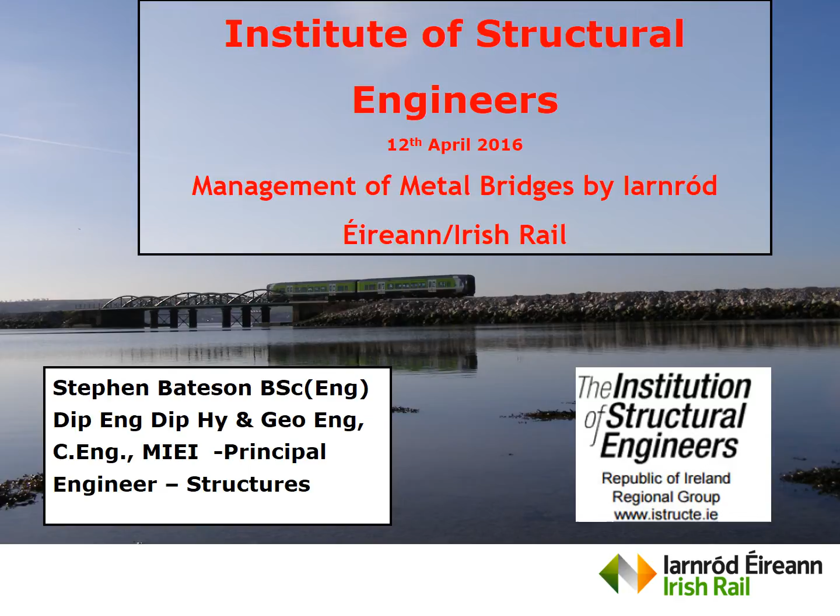Irish Rail has obviously a historical stock of bridges back from when the rail was originally built. So we've a selection of materials like steel, wrought iron, cast iron, and the maintenance program for these is specialist based on railway working.

So you have a selection of materials. You have wrought iron, cast iron, early steel. There's riveted connections, riveted plates, and so on.

So any work that we do has to be within the confines of the material, and we also have the problem with running trains and so on. So obviously any work we have to do has to get done within a railway possession, and also fit within the existing railway envelope and so on.

So our maintenance renewal program is based on a cyclic inspection regime, and we have a bridge management system.

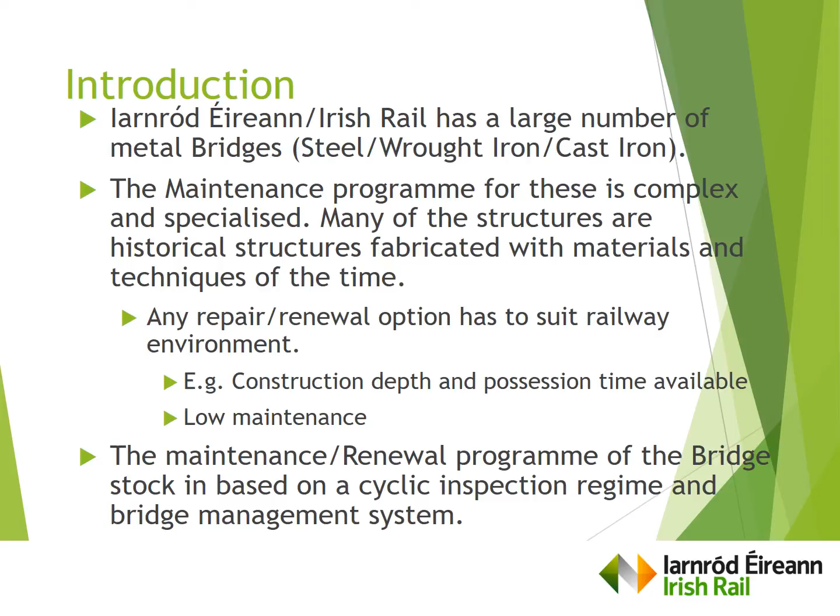So the topics here to discuss are the number and the nature of the railway bridges, the bridge management system, the common defects that we see, our design criteria, our repair specification, our paint specification, and I've included a case study on the Boyne Viaduct, which we undertook the work mostly in 2015.

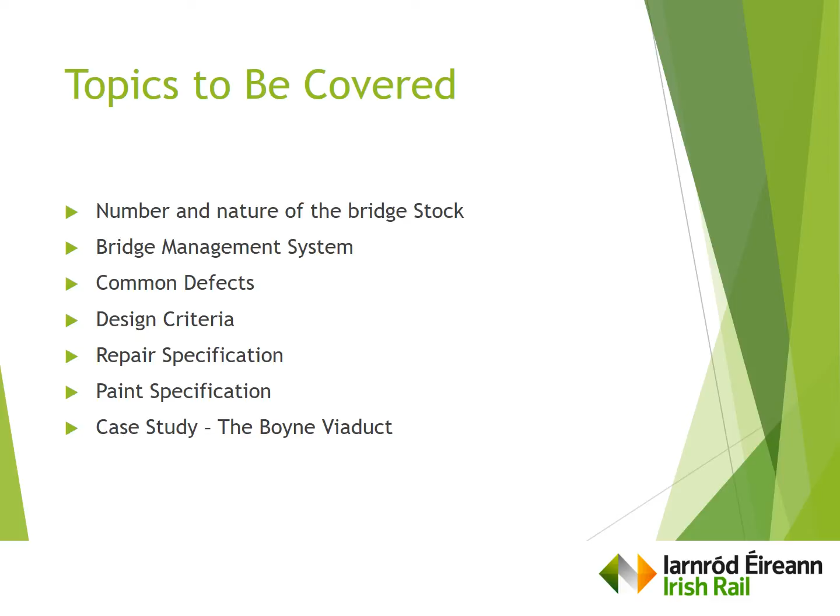Within the Irish Rail network, we've got approximately 5,200 bridges. Approximately 1,000 of those would be wrought iron or steel. There's a few bridges with cast iron elements, mostly decorative now. There would be no load bearing cast iron elements.

Most of our metal bridges would be under bridges, which is where the road or the river or whatever is under the rail. Our over bridge is where the road mostly would be over the rail, so the few over bridges would have containment issues. They tend to be plate girders, so they would have road restraint issues. Thankfully we have few of those.

There are a few cast iron jack arches, but they're on disused or abandoned lines, and none of them are on operational railway lines.

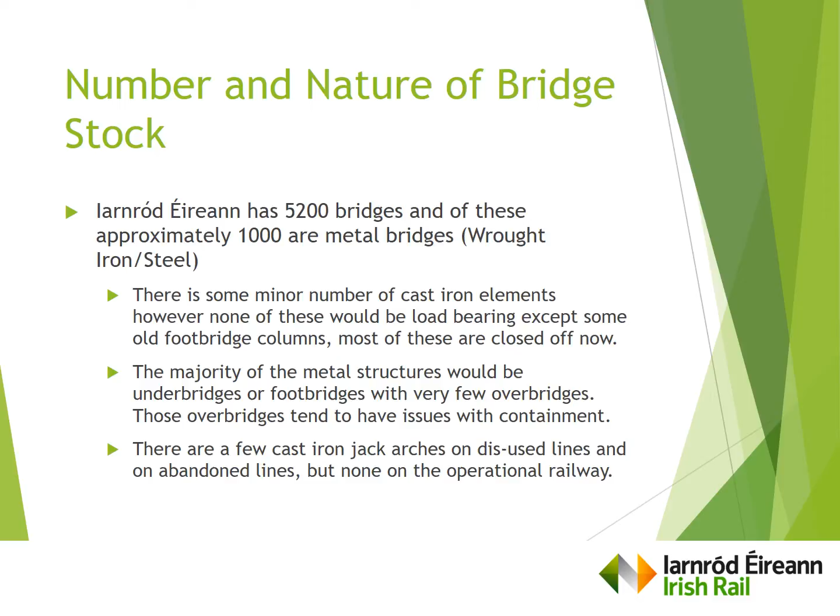Within that 1,000 bridges, there's approximately 330 troughing bridges, which is the corrugated steel or wrought iron flooring. But an additional 200 of those would be plate girders with either solid plate or again corrugated.

Some of these we term principal bridges, which is a span greater than 30 metres, or multiple spans with spans greater than 20 metres. Some examples of those would be the iconic bridges like the Boyne, Thomastown, the Loop Line Bridge, Gormanston, Bellvelley, Slatty and Drumsna.

So again, to make up the 1,000, the remaining would be footbridges or troughing bridges that span abutment to abutment. Troughing would be very much a railway bridge, very basic design and detailing. In terms of other networks, Irish Rail would have comparatively few large principal bridges.

A colleague of ours worked in Network Rail in Manchester, and within that area alone they have a greater number of principal bridges than Irish Rail would have in the complete network.

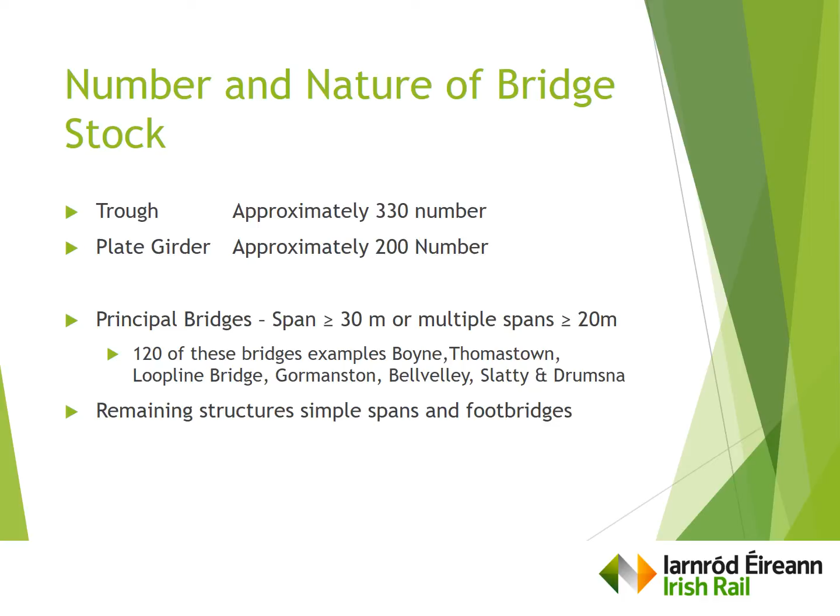So we'd have plenty of examples of Dorman and Long.

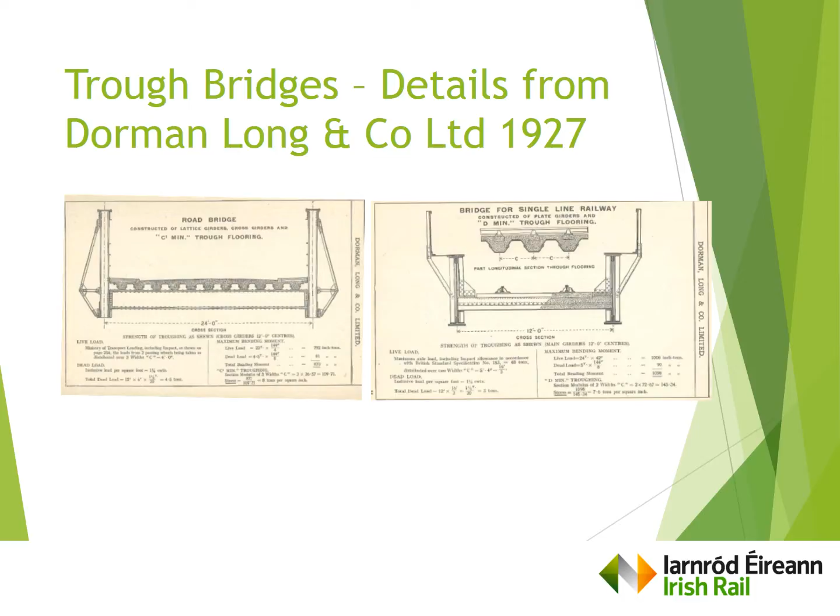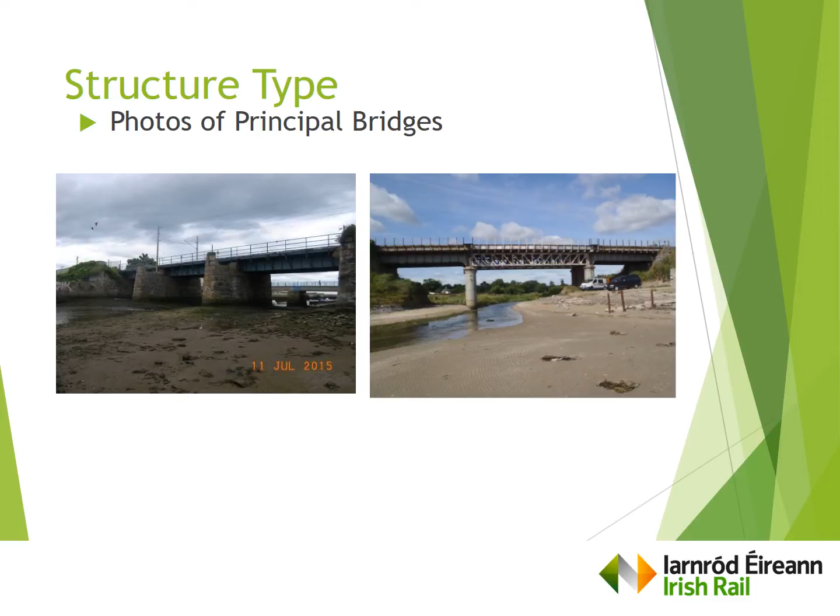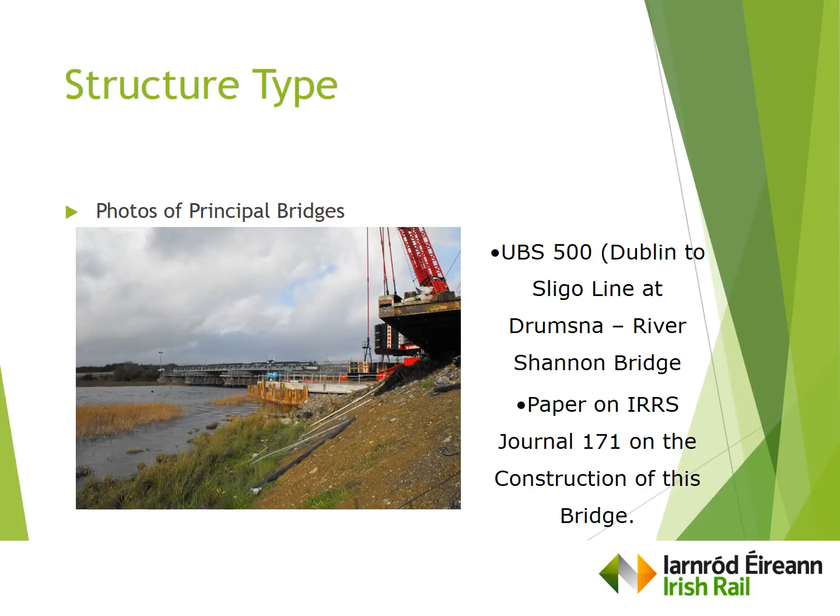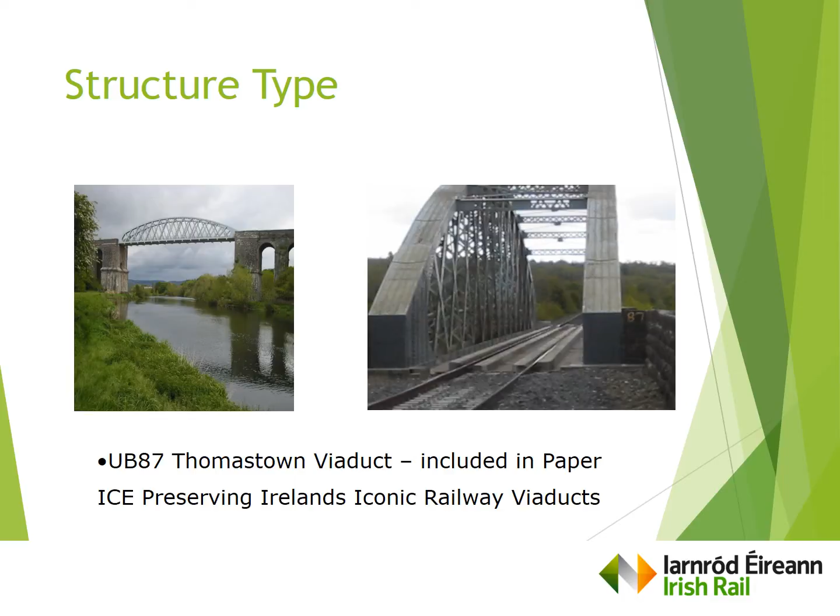In terms of our bridge management system, we undertake a biannual inspection of all our bridges, called a general engineering inspection. Every 6 years, the same structure gets a principal engineering inspection, which requires a touch inspection of all the load-bearing elements. So we've access requirements there.

We also undertake a rope access inspection on the large spans, the multi-span principal bridges, and that feeds into our assessment section, which I'll go into now.

All our bridges are rated under design, condition and deterioration, and we call it a DCD score. Obviously the condition and the rate of deterioration are the variables that may change within the period of inspection, so within every 2 years you have a measurement point for the condition or rate of deterioration.

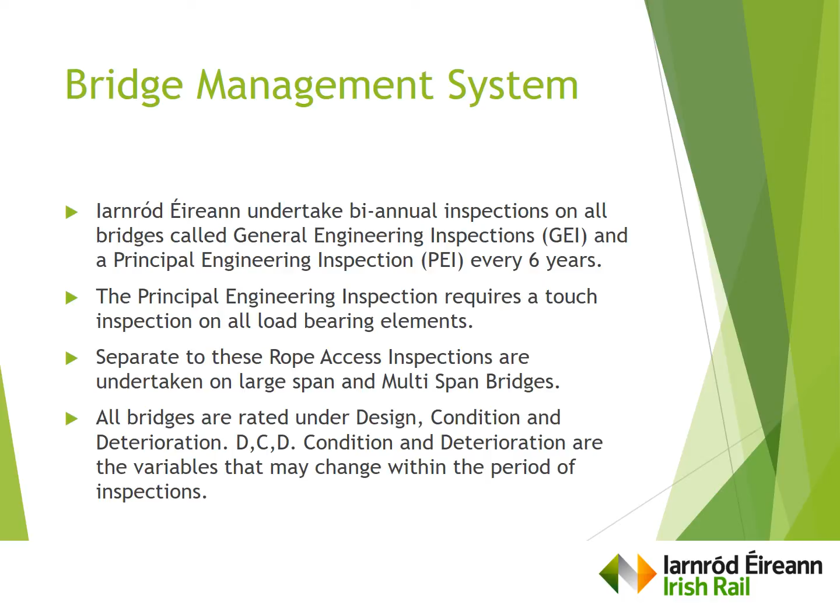So assessments - we have undertaken assessments in the past on a case-by-case basis, primarily to BS 5400. We're trying to develop a more formal process, progressing that from this year. It involves desk studies, data collection, assessment calculations. We're going for level 0 as in the Network Rail assessment program.

Network Rail said they would undertake a full assessment on all their structures over an 18-year interval. They commenced that, but they found that time caught up on them. So in terms of the complexity of the assessment, they had a level 1, level 2.

They actually developed level 0 to allow for a kind of generic assessment on similar spans - like all plate girders up to 20 meters with a depth of a meter and 300 width and so on - they were able to provide an assessment to that level. So they're stating that they're getting closer to getting full completion in 18 years.

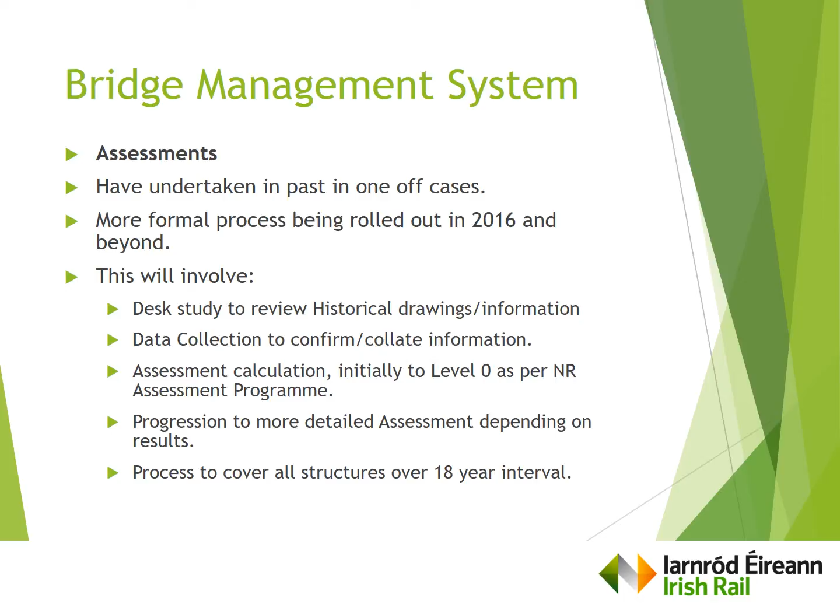Just a section here on the common defects. Our biggest problem is water and corrosion of our bridges, and then the lack of money to maintain them.

We find that we are overly relying on the fact that all bridges were very well built. They put pitch and tar over the steel elements, and that has held for such a length of time. But as deterioration increases over time and progresses, you find that the waterproofing is breaking down, so that you get corrosion at the back of bearings and the back of main beams and trimmer beams and bracings and so on at the back of the bridge.

The paint systems that were originally employed were lead based, and again, due to lack of investment and lack of painting - if it wasn't for the red lead, we'd probably be in a lot worse situation.

Drainage in the form of drip eyes from the decks - where decks were modified, you may or may not have had a proper drainage system or drip eye installed to remove the water. When they were installed, they also needed to be maintained, and we found that if they weren't maintained, it often causes as bad a condition when the water starts running onto main elements and so on.

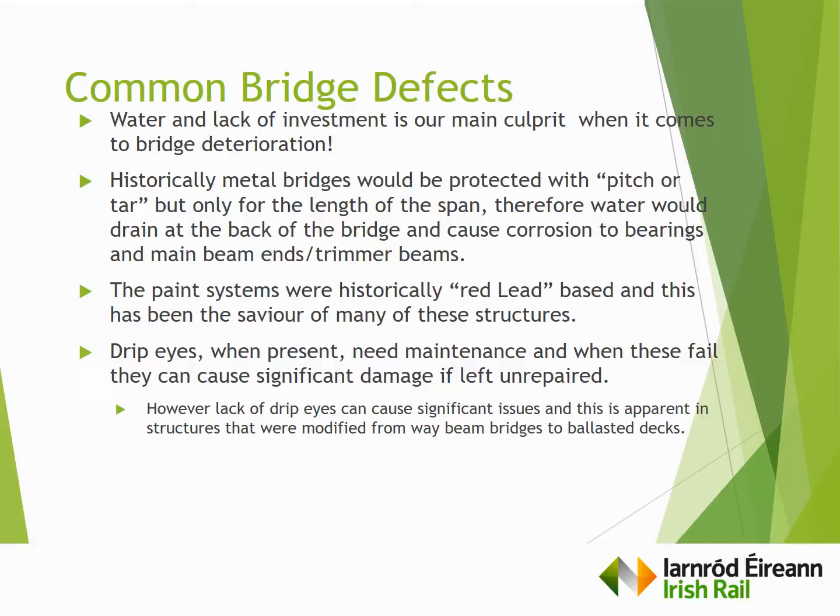So again, a few photos and things like that. In the 90s, the Belfast Line project had traditional way beam bridges, timber decks on top of steel or wrought iron structures. They took away the timber rail elements and put down flat plates of steel.

They were never particularly sealed or had drip eyes installed, and then we come along 20-25 years later to find that the tops of flanges and bracings have all corroded in a perfect way, because we've basically provided water and oxygen to a perfect location, with all sorts of material dripping down with the crushed ballast. So it all creates an environment where water can sit and progressively corrode the elements.

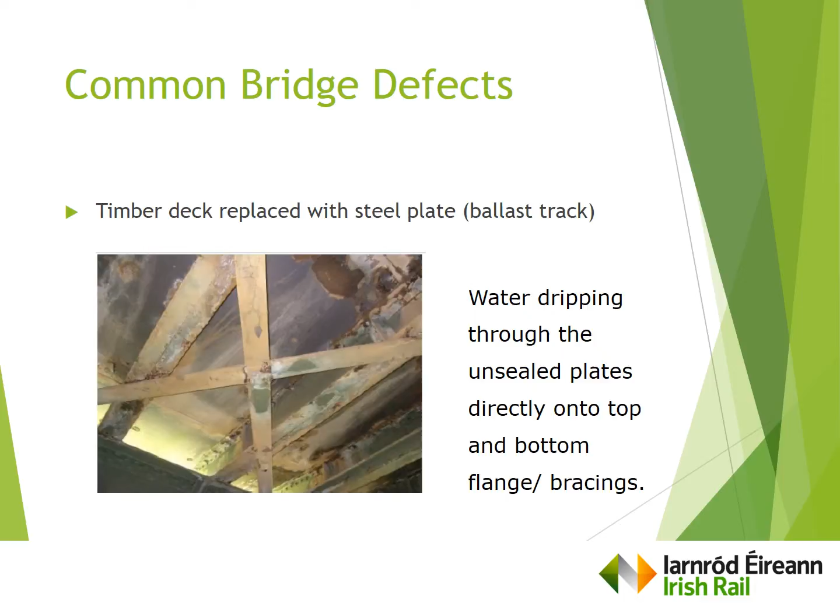This bridge here on the left, that's the corrugated troughing sections sitting onto a main girder. There was never drip eyes installed, there was holes left, so you basically got water spreading out across. Once the water sits in, it starts corroding on the inside of that bottom flange. It's very hard, if at all, to repair it.

Over here, that's actually a photograph from the Boyne Viaduct. The drip eye at one stage was functional, but once it started to corrode, as shown there, the water was basically just dripping onto the bottom flange, corroding and damaging that area.

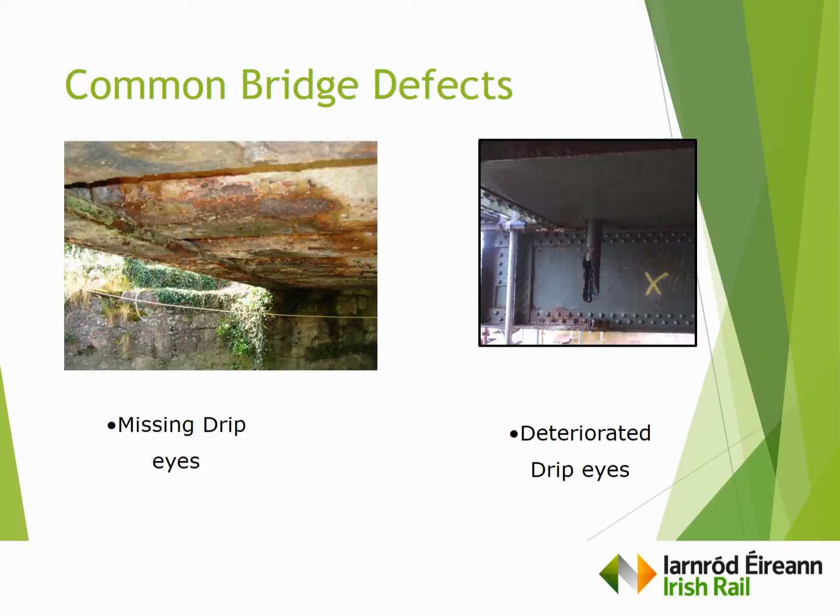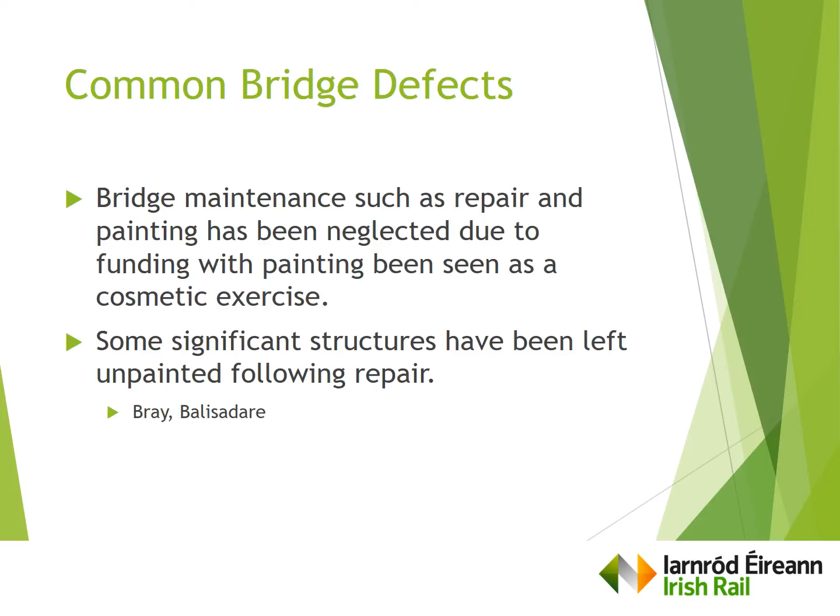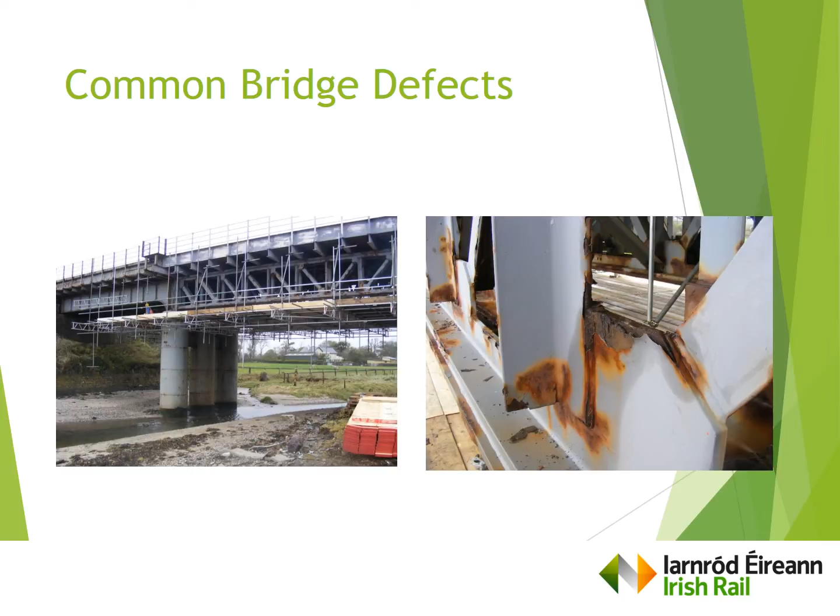That's Gormanstown there. That bridge, we went in to repair it, and found the painting system had basically completely failed in 20 years. There was no stripe coating, and for a new deck it was in poor condition after a very short period of time.

On the plate girders and troughing bridges, this would be one of our most common defects. The web stiffeners would be maybe 2-3 feet centres on the girders, and once there's water sitting in underneath that stiffener, you get a significant amount of corrosion. We would go to some bridges and maybe require 30 or 40 of these to be replaced. Depending on how bad the corrosion is, we might try a local repair, or sometimes we have to replace the whole thing.

Again, that was one of the bridges with the top flanges, water coming down through the top plate.

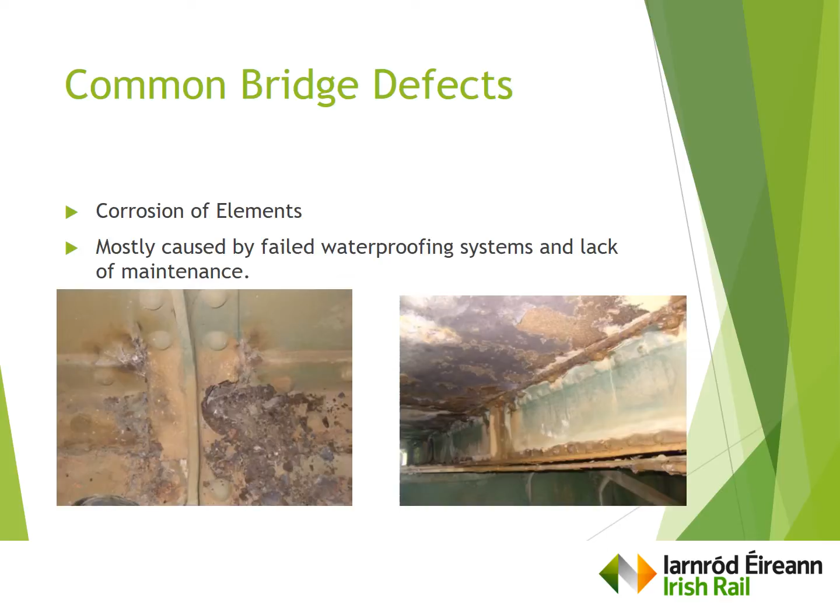Rivet replacement - we have a bridge gang, and up to the 1970s they were still doing hot rivet replacements, but nowadays we replace rivets with HSFG bolts, grade 10.9. They take a fair bit of effort to remove and replace.

We allow about 1 in 10 to be damaged before we start replacing them. But on a general enough bridge repair, we could do 2,000 or 3,000 rivet replacements on a bridge. I think we did 15,000 rivets replaced on the Boyne. It's a traditional system we've developed and tried to improve. We have to burn the head of the rivet and use a rivet punch to force it out. It's a noisy, time-consuming, and difficult process to undertake in confined spaces.

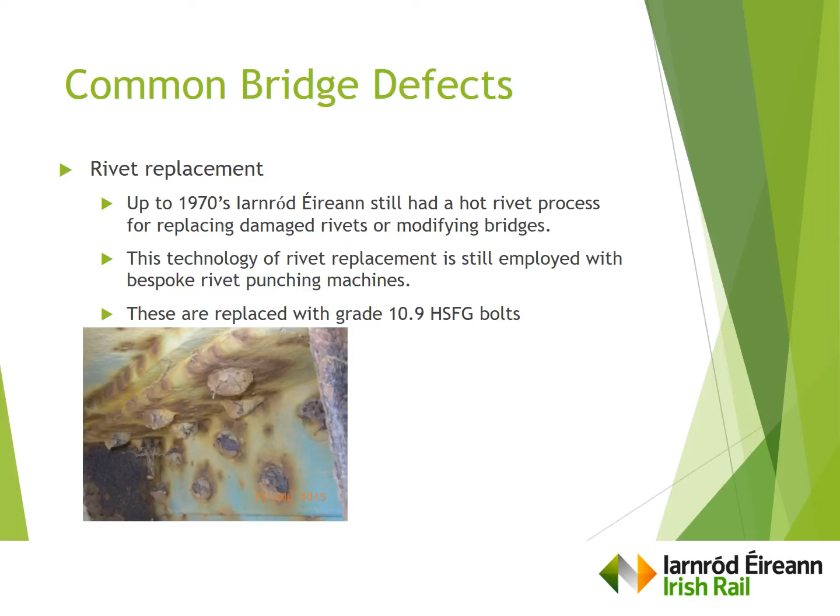Just going to show a few photographs, most of these are from the loop line bridges between Amiens Street and Pearse Street. Again, most of them are plate girders with troughing sections on top. Very hard to maintain, being the busiest location rail-wise and probably the busiest location road-wise, so it's very hard to get road closures and rail closures to coincide.

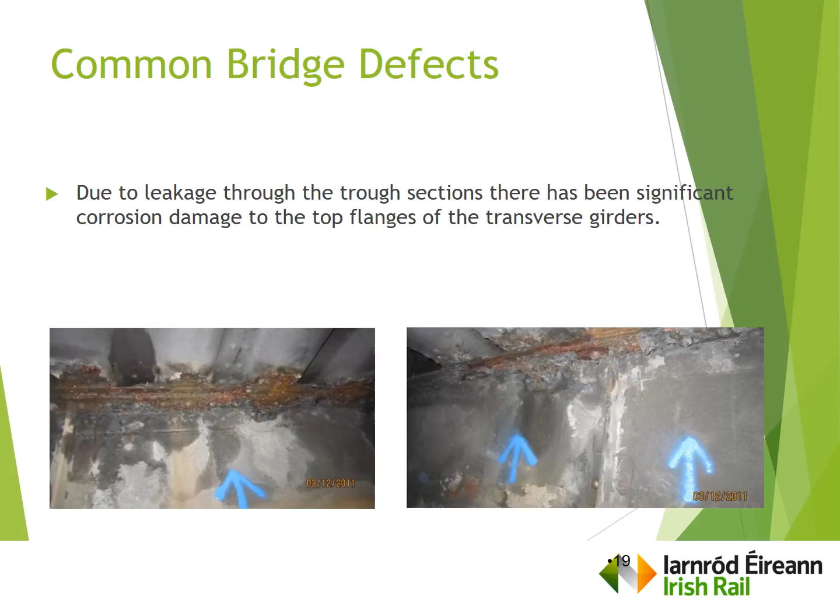They've suffered from that effect, and we've tried to do lots of patch-up work trying to stop water coming through. But you can see that would be the summary of the general engineering inspection - multiple areas of leakage, flanges and damage, bridge strikes.

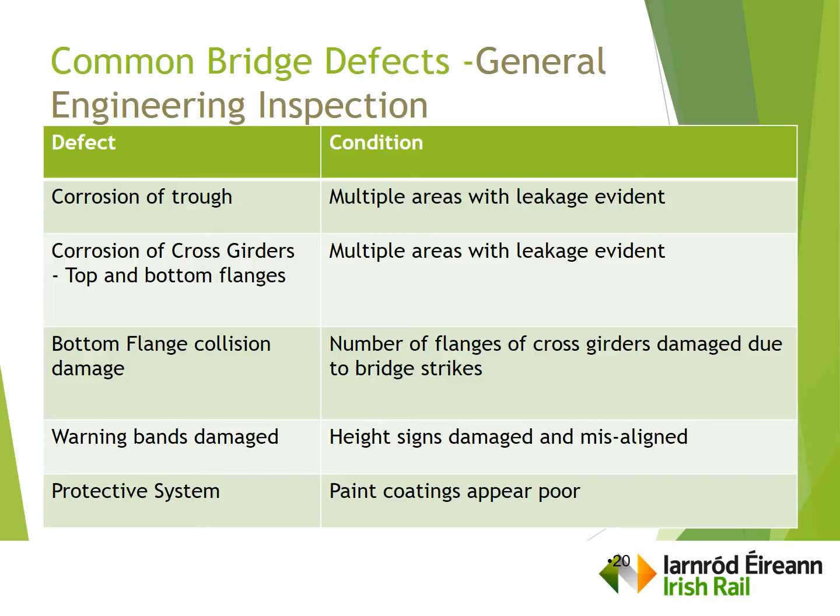I'll show you a bit on bridge strikes, and painting, coatings. The same with this one - you've quite significant corrosion on the bottom flange, you've a knife edge on these. These were just two small repairs that we had to undertake on Amiens Street.

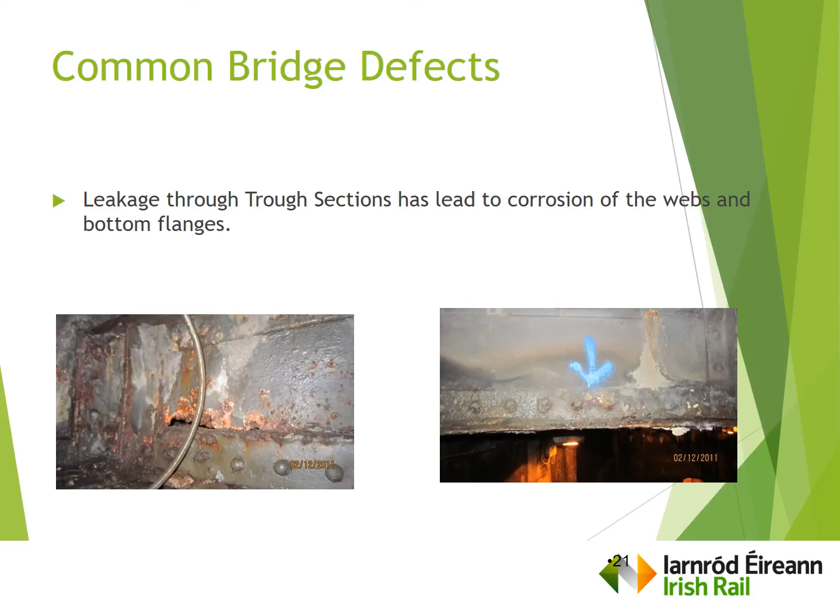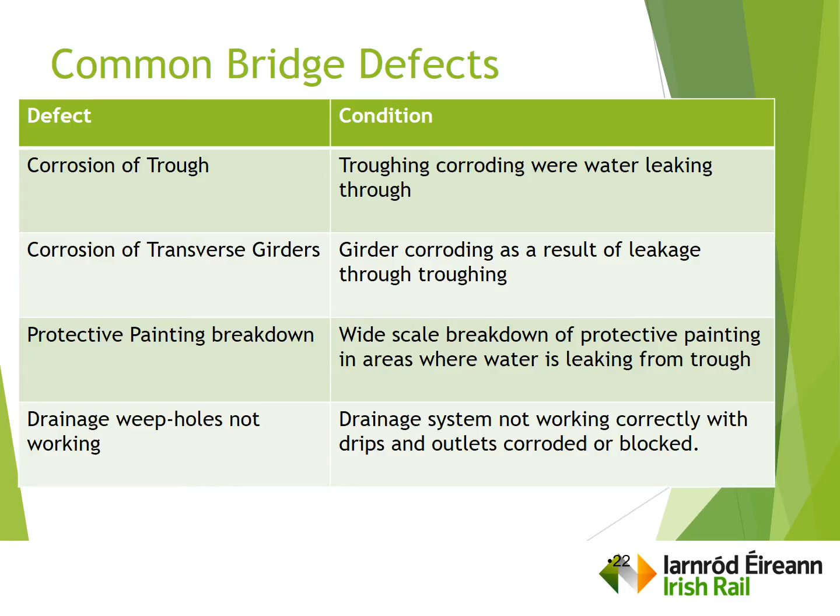A few words of summary on the findings of the general engineering inspection: the common thing is we've leakage, we've water, and it's causing damage. That's the bridge in Trinity College, I think - you have two decks butted together, water dripping into the drainage which goes into a conventional half pipe. That's all blocked up, and then you see what happens - it's just basic corrosion.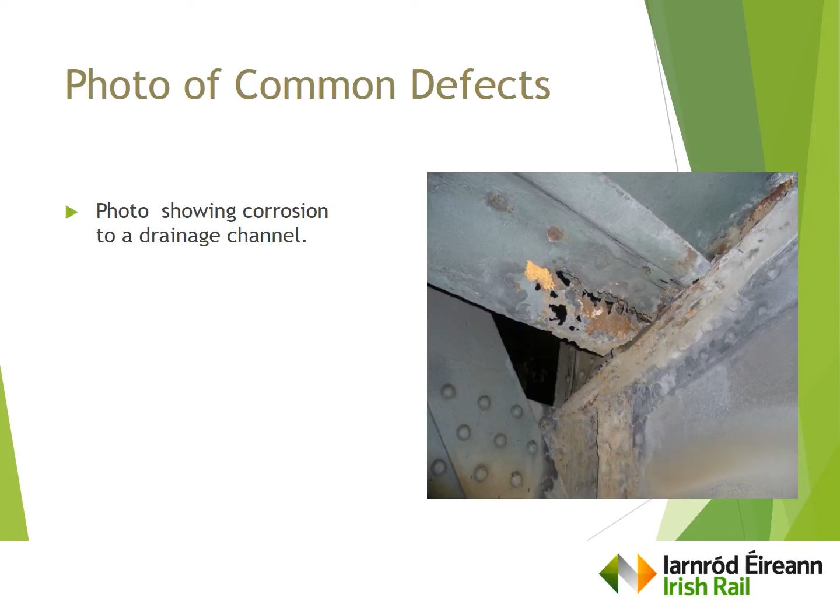Rust jacking - for that we'd have to take out a significant amount of rivets and plate around that damage. We wouldn't attempt to remove or replace that jack plate at all. I think we'd just plate around it and try to seal it.

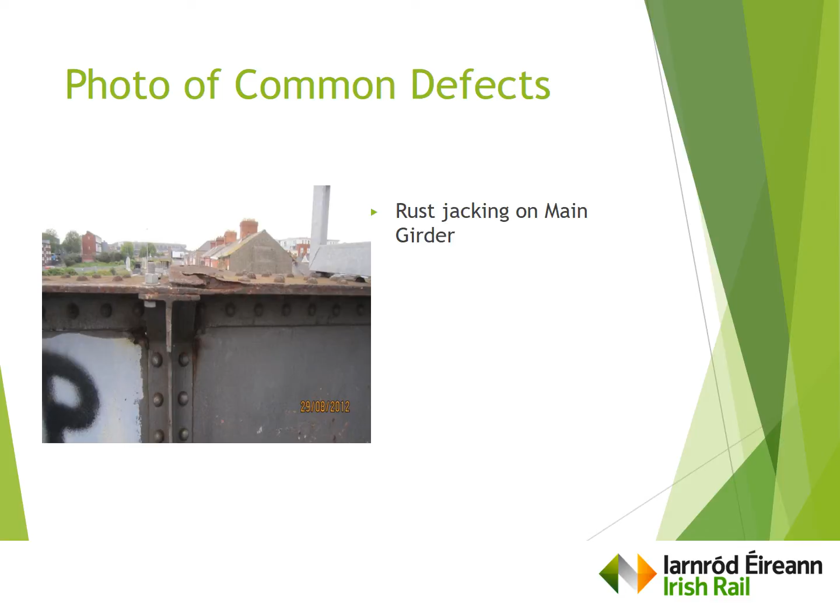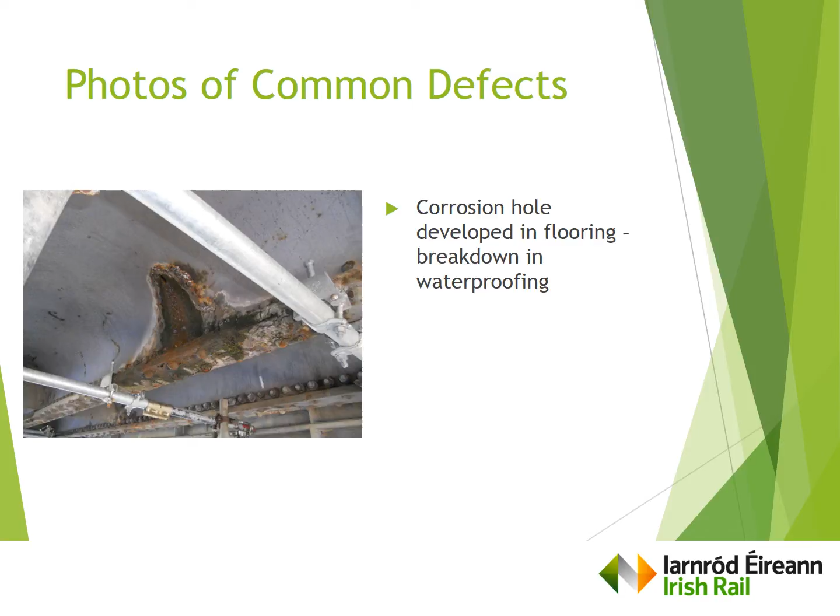The seam on the trough - leakage again, holes and damage to the cross girder. One of our problems again, this is bridge strikes.

Custom House Quay, you can see up on the right hand side there - at one stage was our most struck bridge. It's probably always in the top 2 or 3. Even though vehicle heights are advertised etc., the vehicles still collide with our bridges.

So you can get tears, as in that example there. You can get scrapes - I know it's not a great photograph, but you get scrapes on that - and then you can get kind of bizarre behaviour with guys travelling.

That was a fair job to break the arm off a machine like that. He was travelling fairly fast to do that.

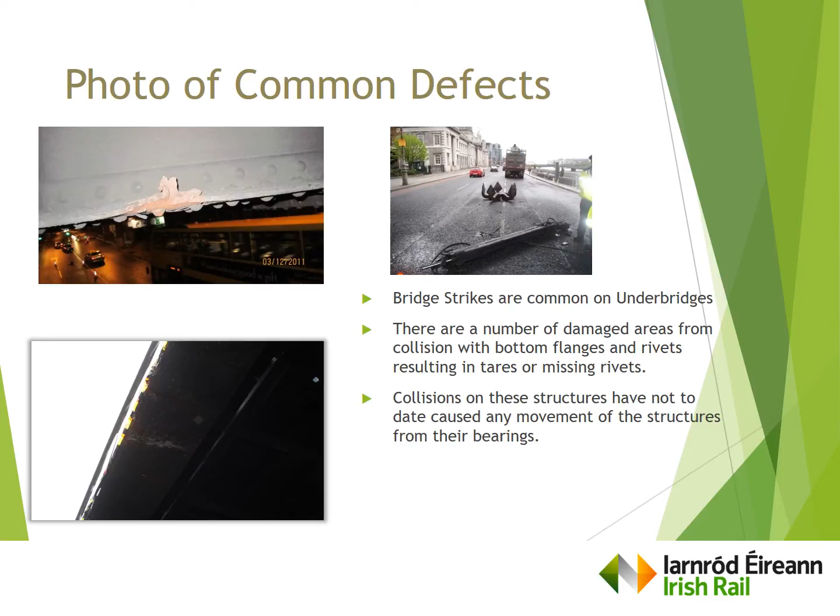So this is just the kind of summary of the damage on what was the most struck bottom flange we have - that's the Custom House Quay. It's facing the Collins Street side, just outside the Custom House.

The construction of that at the mid-span was 7 laminations of single plate, half-inch plates, with 7 lines of rivets. The traffic side had only got 5% of the original rivets remaining, and it decreased across there so the second line had only 10% of the originals left in it.

Every time a bridge gets struck like that, the trains are stopped. We're going out to have a look at it, the track people are going to have a look at the track, and all that time people are sitting on a train wondering what we're doing. The traffic is stopped, and it can be mayhem around.

It can be very difficult actually getting to the bridge for us. But again, we have to go back in and try to replace rivets that have been sheared off like that.

We've tried to do the advertising and so on. We have to continuously do that and re-educate people on it.

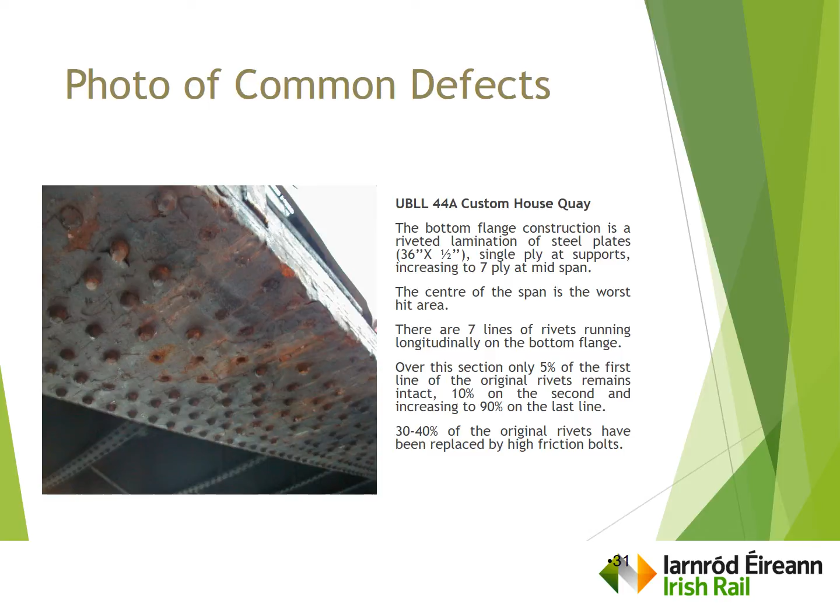When we are designing new bridges, we have a design standard, an internal standard. We design to IS, the Eurocode, isn't it? We have geometric designs we have to meet, so that there's robust curbs and so on, heights of handrails and so on that have to be achieved. We also have standard clearances for trains, so there's a dynamic envelope that has to be provided within any structure to avoid any possibility of collision or so on.

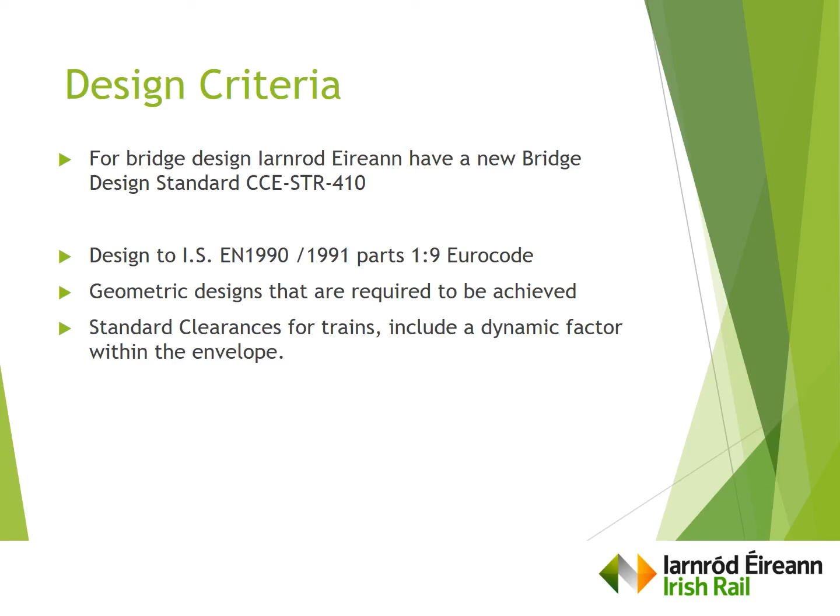We also do kind of like-for-like replacements and designs. This is because a lot of the time we're building back within a very confined envelope, and so we would have to do a like-for-like replacement - we would try to install and put back what was originally there.

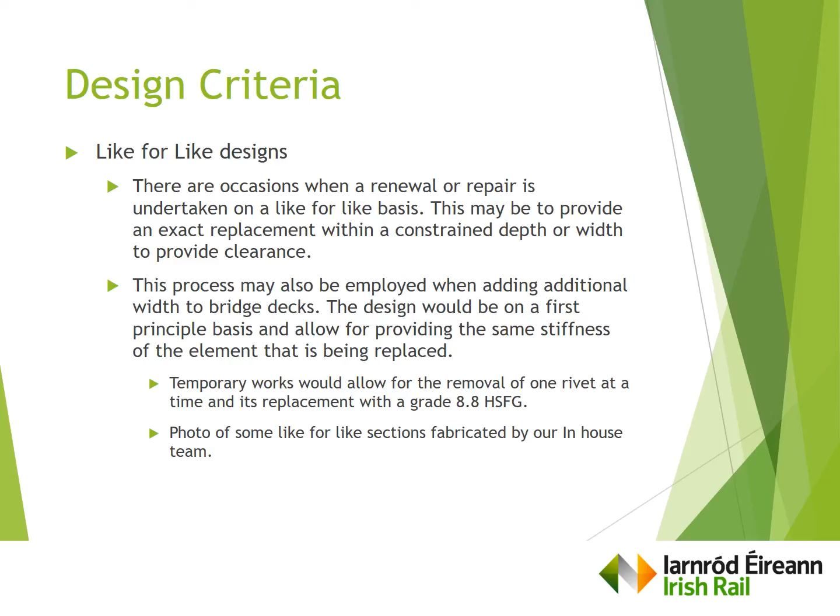I just have a few photographs there - so we'd have to widen out sections and so on. That bridge is quite a low clearance, so we had to widen out a walkway, widen out the deck to provide for a walkway. We had to use troughing sections, reclaimed troughing sections to make that work.

We have a fabrication facility in Mullingar where we do a lot of our own fabrication. So we would do the design in house, or use consultants where required, and for steel bridges we would fabricate them ourselves. We have independent weld testing for that, and also when coating for galvanizing and for painting, we have independent checks for the quality on those.

So we had to replace a full bridge there, so we fabricated that ourselves using troughing sections.

This here, bottom stiffener - there was a bridge near Connolly Station, and all these stiffeners were corroded. We replaced all those, we tried to put them back in galvanized steel, and then when we paint the bridge, the galvanized steel just receives a sweep blast, and then we paint it as we would the rest of the structure.

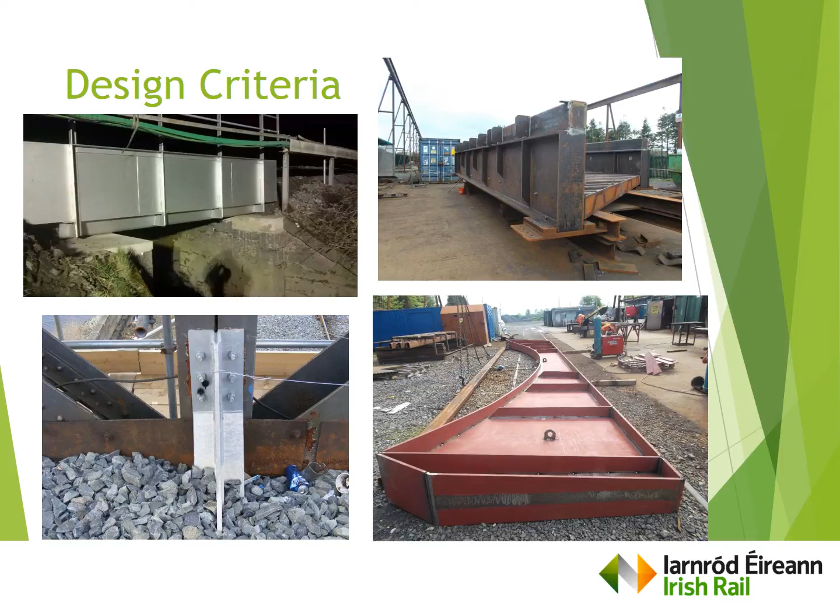Our repair specification would be to reinstate the structure to its original strength and stiffness. It involves significant works when working with riveted plate structures, lattice girders, and elements made up of riveted plates, angles, and sections.

We replace all our rivets with HSFG bolts. We only replace load-bearing members during a railway possession when there are no train movements, and our preference is to replace plate sections with galvanized material.

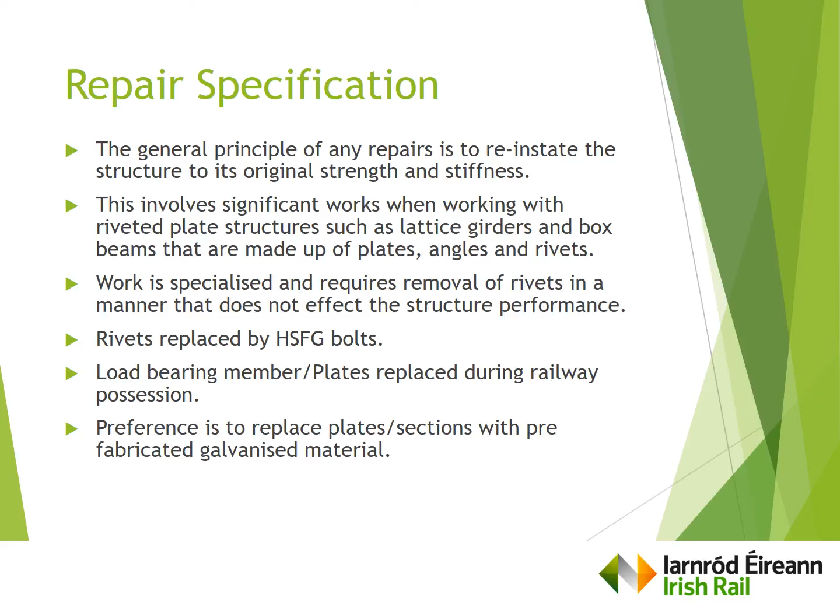When we identify a damaged area, we produce a schedule of repairs, we produce a drawing, we choose our material, which may be high grade or normal grade, but we'd use the J2 minus 20 degree material for the steel. We have our own internal fabrication section, and we have our welding and coating testing inspections, and we do our installations during our railway possession.

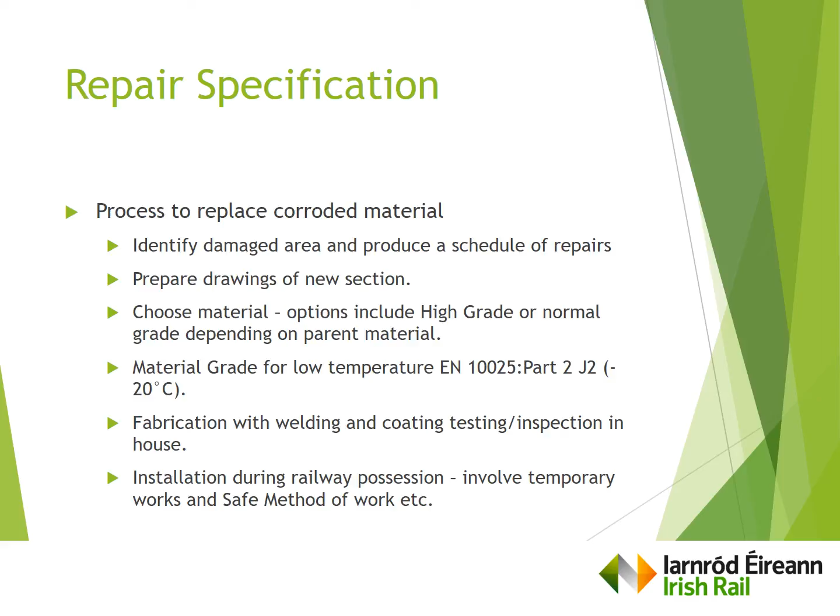For our painting specification, most of our historic bridges would have been painted with red lead as a primer. This provides a significant barrier to corrosion, but it leads to complexities for painting projects because of environmental and health and safety problems in terms of blasting, burning, or removal of red lead, and then you have to capture it and dispose of it correctly. So you're looking at full encapsulation, correct handling, ventilation systems, and PPE for all operatives and so on.

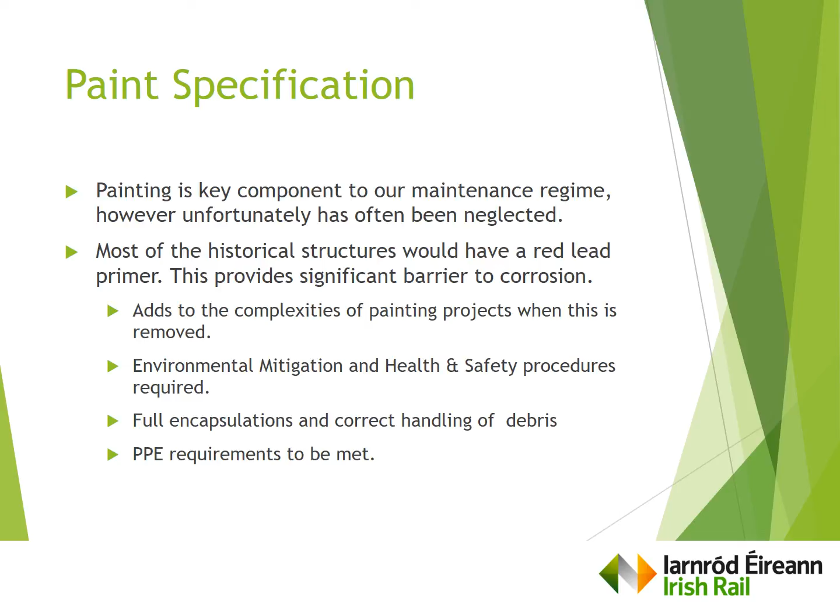On surface preparation, we'd use SA2.5, or we'd use ST3 in some areas such as stations and around housing. Our systems would have a primer, whether it be a barrier or an inhibitor. Zinc phosphate would be an inhibitor, or we'd have zinc rich as a galvanic barrier.

Some of the systems aren't suitable for on-site application. We get comments about using zinc-rich primers on structures, because of the environment you have to create a suitable environment to apply the zinc-rich primer. The zinc-rich primer would probably be the best, but it can be difficult to apply to old structures that have corrosion, pitting, or any type of laminations. We would commonly use the N4 system from the network rail standard.

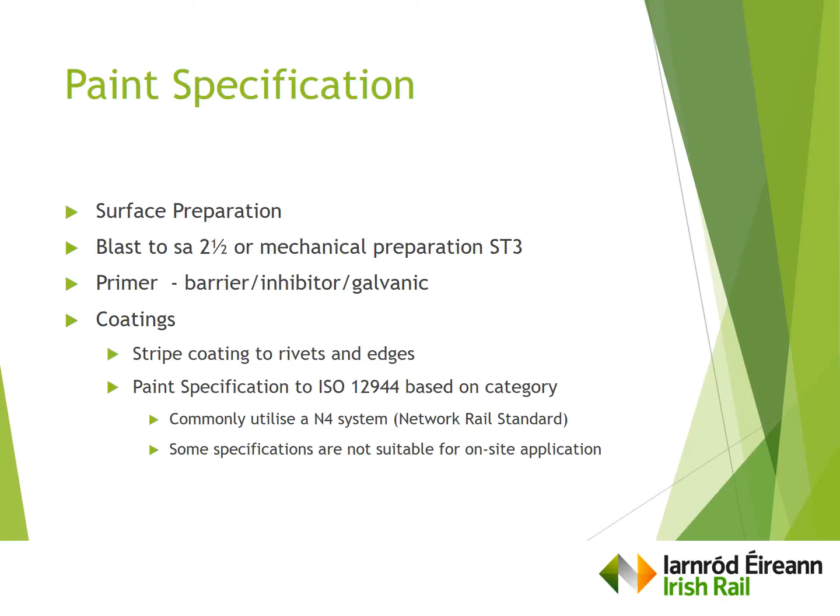I was going to do a little bit on the Boyne Viaduct. For those who know, the Boyne Viaduct would be our largest bridge on our network. The original structure was built in 1855. The 3 steel spans were renewed in the 1930s. The structure would have suffered from a lack of investment and was last painted in the 1980s. The middle span possibly wasn't painted since the 1930s, and it's difficult to see that it was.

We benefited greatly from having an inspection scaffold on the entire structure in 2011, 2012. From that, we were able to itemise and list all the repairs and the defects.

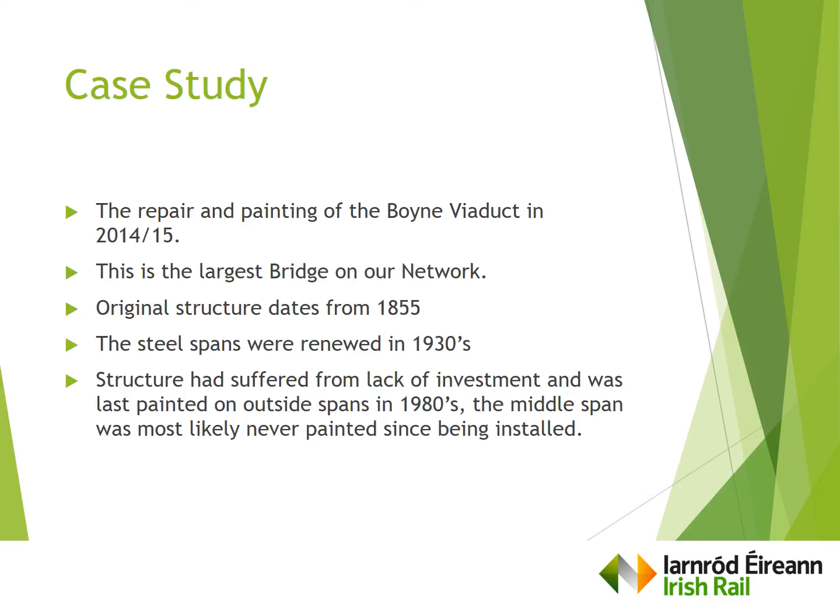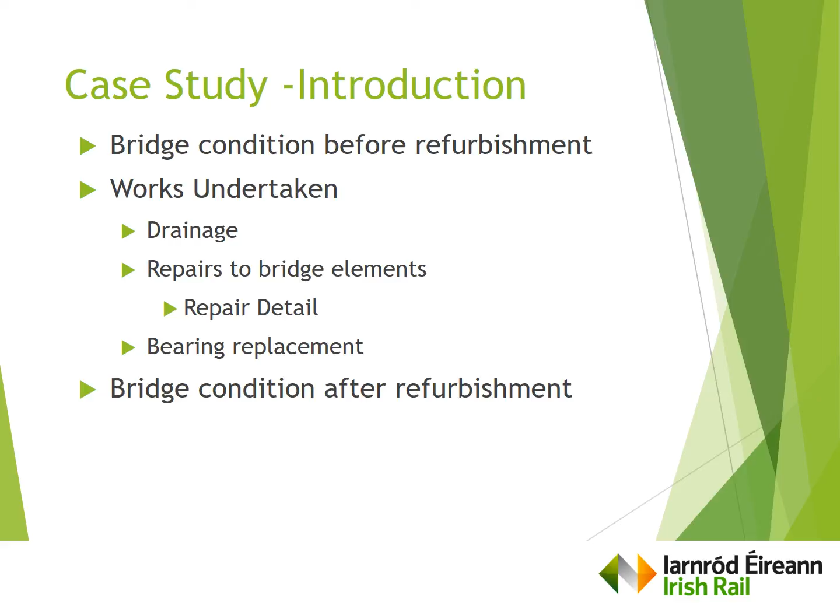The structure in terms of deterioration wasn't too badly deteriorated, but there was works required on the drainage. There were some elements requiring renewal, and the bearings were all seized and in poor condition. And obviously the bridge needed painting, so the paint system had broken down.

To put a detail on that, surface water was dripping through the deck and the drip eyes. The drip eyes were corroded and falling asunder. The paint system was effectively broken down, but there was still protection provided by the red lead. The lower elements had some section loss and had suffered from some corrosion, particularly those toe stiffeners, some of the bottom flanges, and the lacers on the lattice girders.

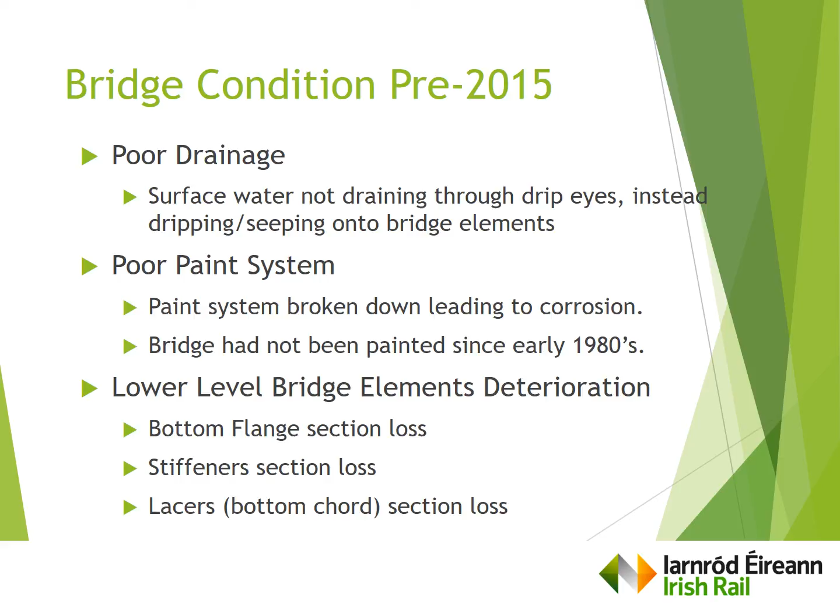Just to go through those photographs, that's the drip eye. Most of those, if not all of those, had not done their job and were all in a similar condition. This photograph shows the lacers between the raking units - that wasn't particularly common, but there was corrosion to that extent on some of those elements.

Some of the bottom flanges where water had been dripping down had caused laminations, such as there, and then some of the toe stiffeners had been corroded like that - again water sitting in underneath the toe and causing corrosion.

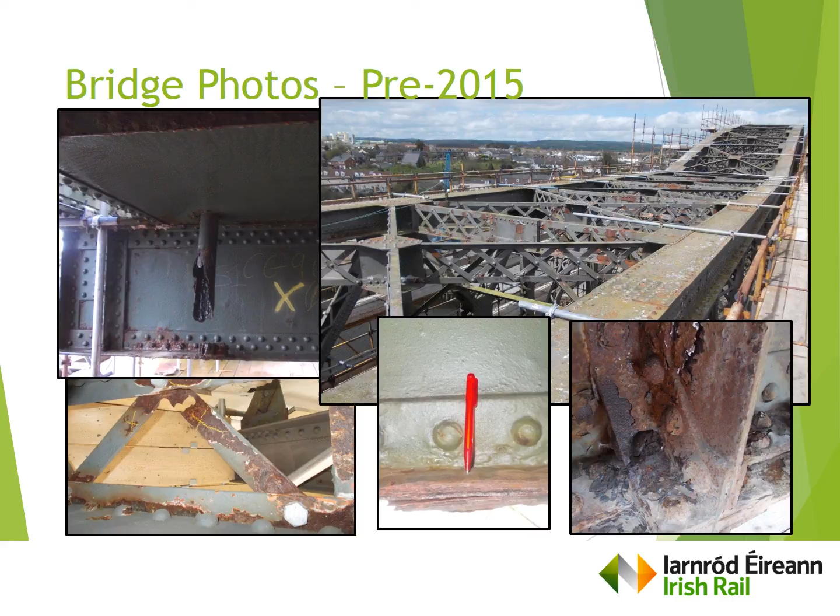Just as a general thing on the painting, you could see from up above there that the paint system had basically - it was beginning to fail. It probably hasn't failed. Again, just to finish out there, the bearings had seized, and they're adding extra stress to the bridge.

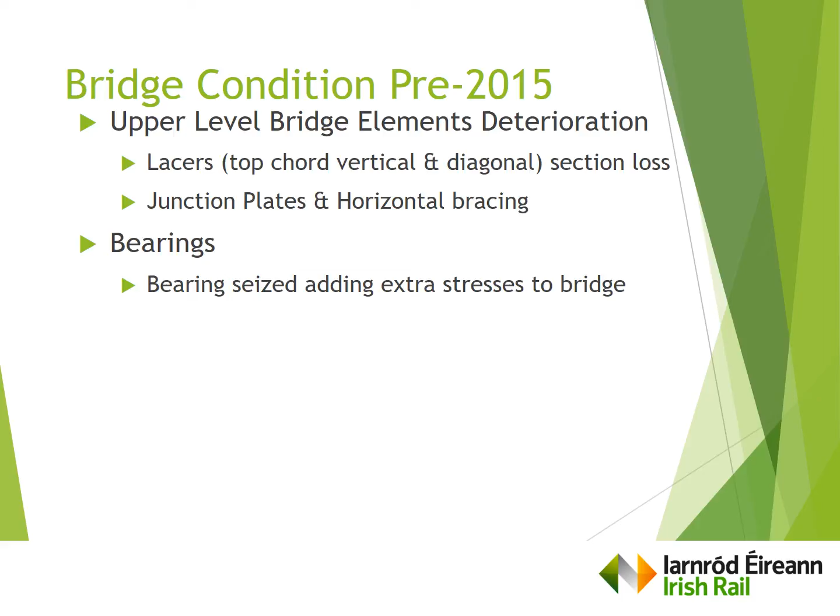So what we did was we developed a schedule of works for each of the elements and on each of the spans of the bridge, and we were able to list the renewals required for each of those elements. So we produced drawings and details of the repairs that were required.

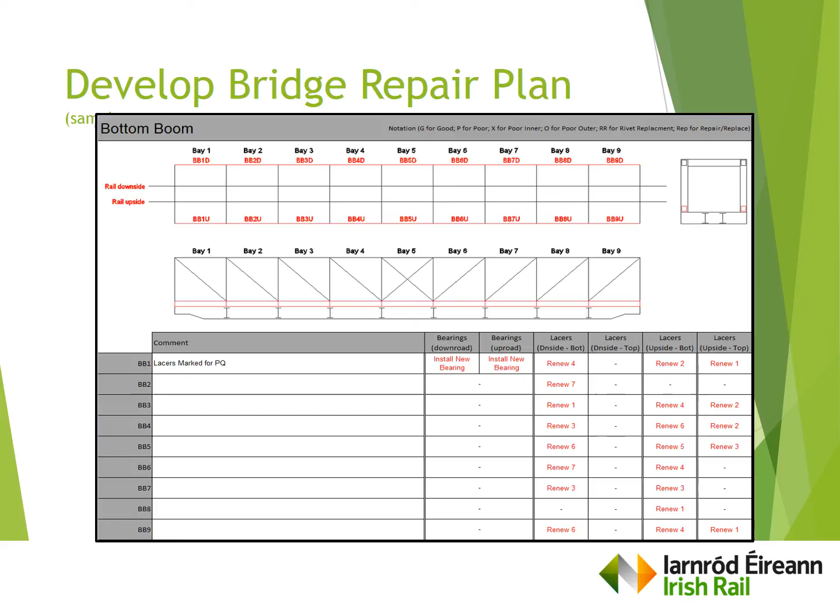So that was the repair required for the bottom flange angles. The bottom flange was made of two back-to-back angles sandwiching a middle web plate. So we had to do that.

To replace that, we would have had to remove all the original rivets over a certain length, and during a railway possession, we would take one angle out and replace it. So we'd have a good system of marking. We would replace every second rivet during the daytime while there was still railway traffic, so you could take one rivet out and replace it with a bolt, and then at night time we would replace the angle.

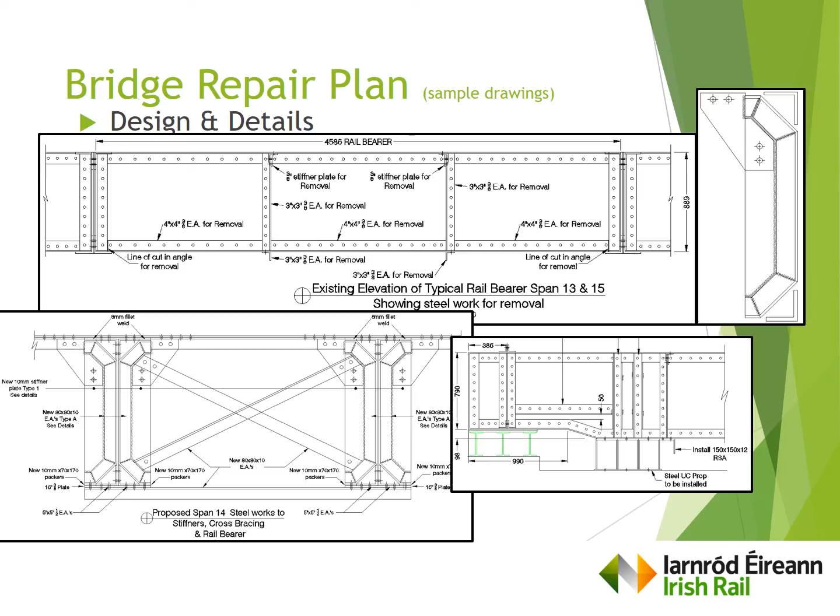So the bracings were replaced, and there's the toe stiffeners, that's the detail for those. You can see some of the details there. That's the bottom flange plate replaced, that's the stiffener, and that's the actual web, the bracing stiffener there too.

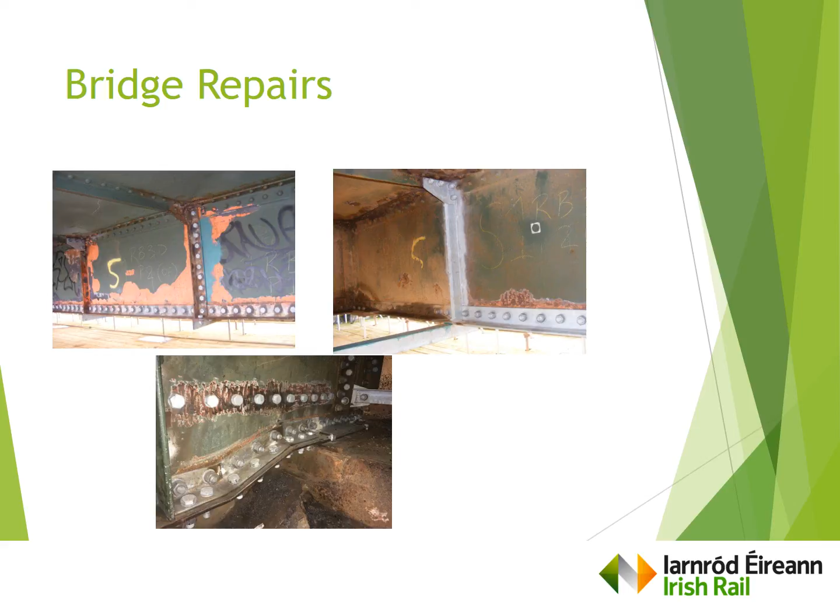Our drainage, again, we identified that the drainage system and the drip eyes were defunct. We fabricated these elements, these kind of down spigots for want of a better word, and we installed them. I left the bottom of it hanging, then we came along and installed from below. Once we had the scaffold in, we had put in all the drip eyes. So what did we do? We replaced 28 of those in total over the whole span.

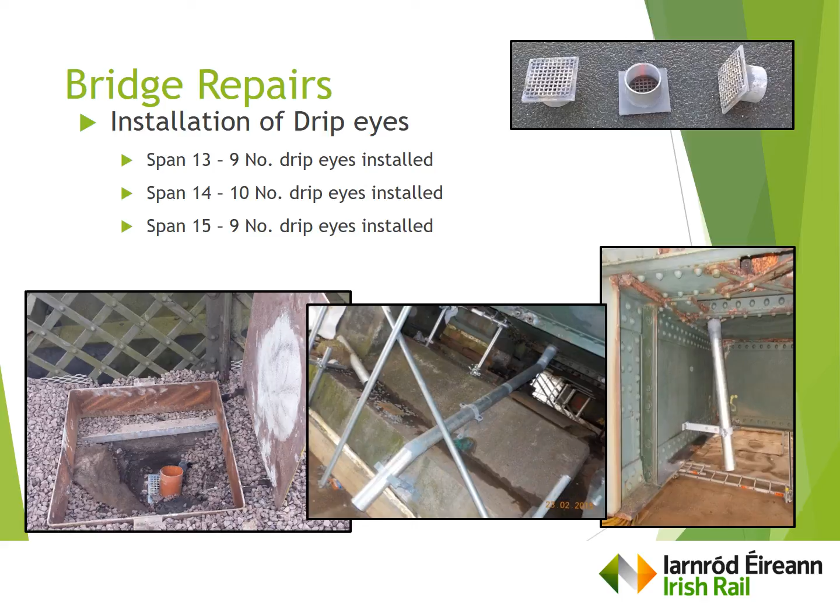We replaced all the upper bracings, junction plates here. Retrospectively, this was a poor detail. Before this deck here, during the scaffold placement, these elements formed a flat plate which water sat on and corroded down through the elements. So we had quite a lot of difficult work to replace those sections and put in those plates.

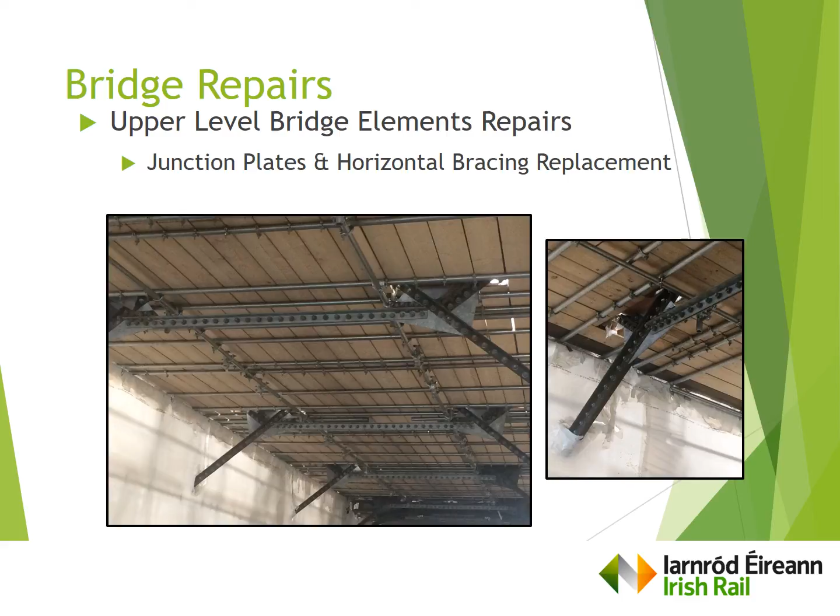The work was done primarily under a painting contract. So the repair element for the three spans, 13, 14 and 15, we had 8 weeks on the two shorter spans, and 12 weeks on the larger span in the middle.

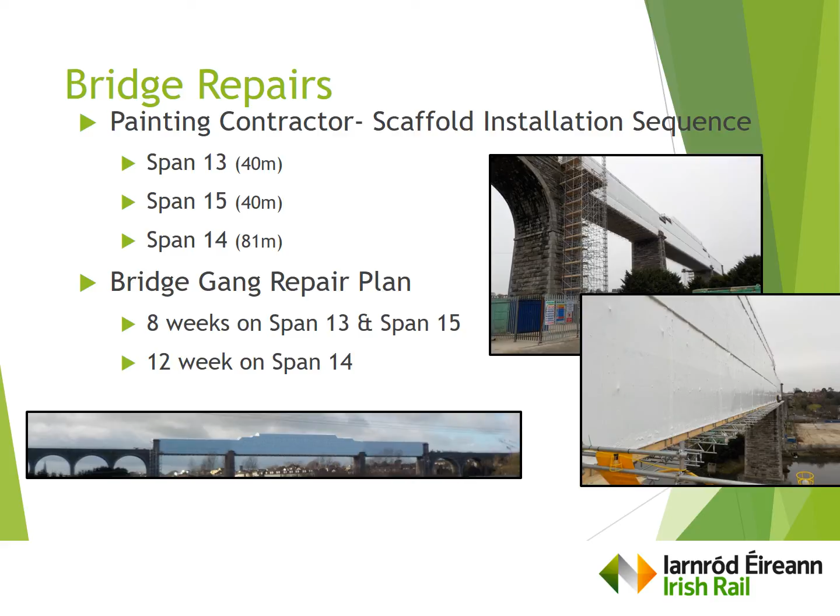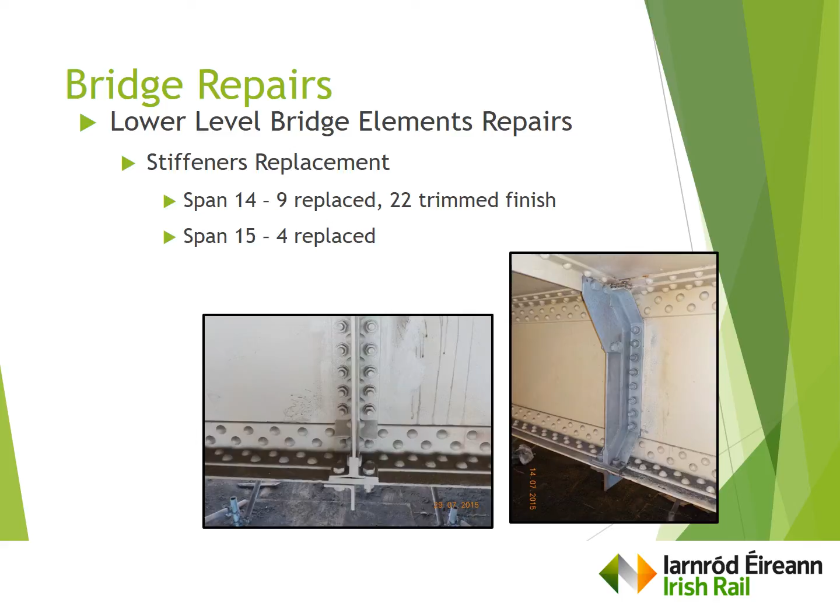That's again just some details there. At the bottom, angles replaced, and some of the elements there, the web stiffeners. We replaced a significant number of them, and we trimmed a few just where it was required.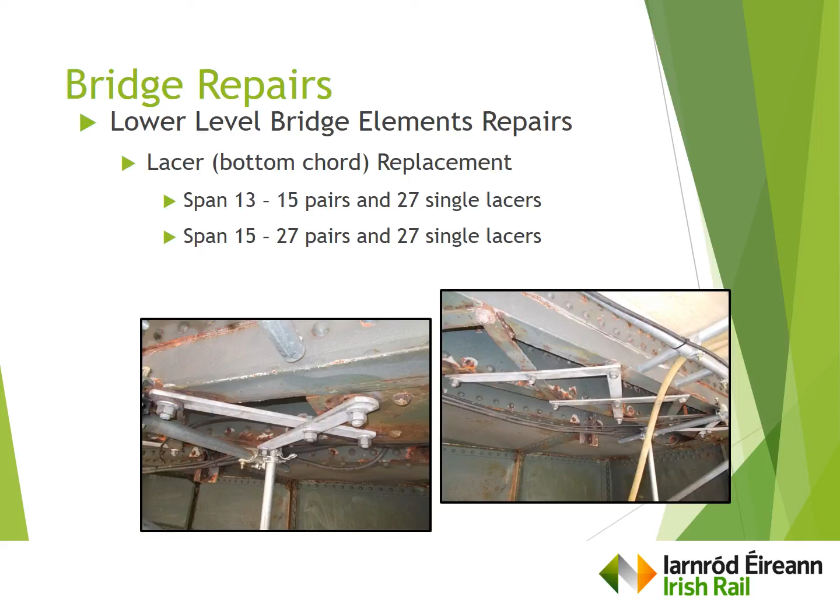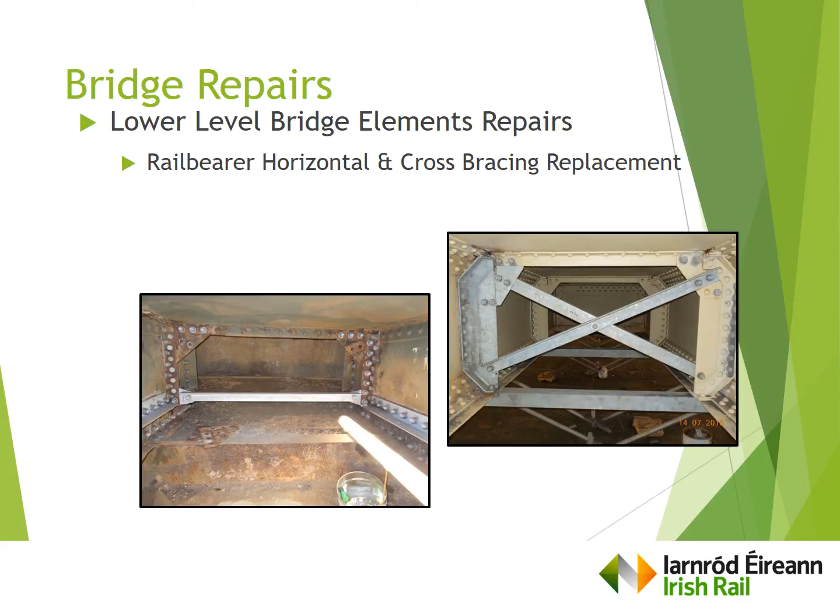A lot of these lacers were replaced with galvanized steel plates. We fabricated quite a lot of those and had them ready to install. Again, some more detail there of bracings, web plates, and so on. Some elements required kind of bespoke solutions. Originally there were lattice elements here, but it transpired to be easier to replace it in the manner that we did, with flat plate.

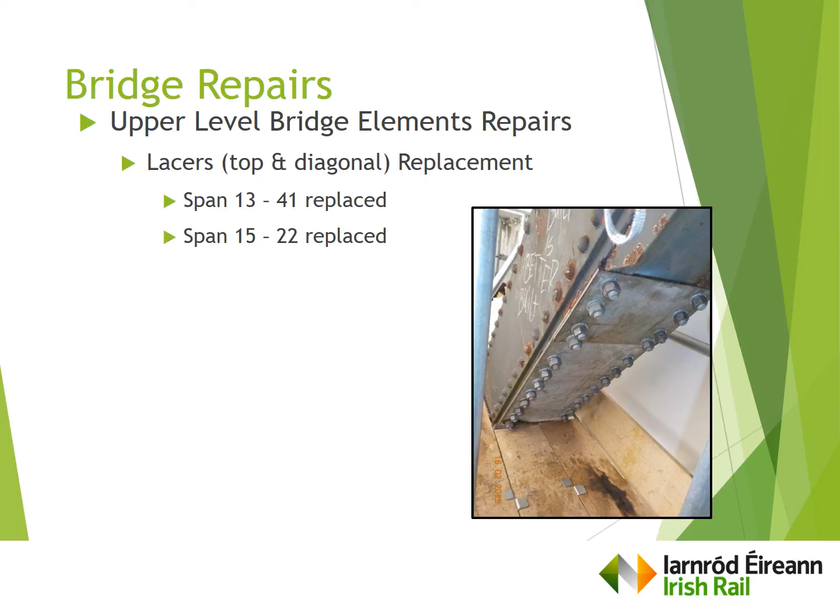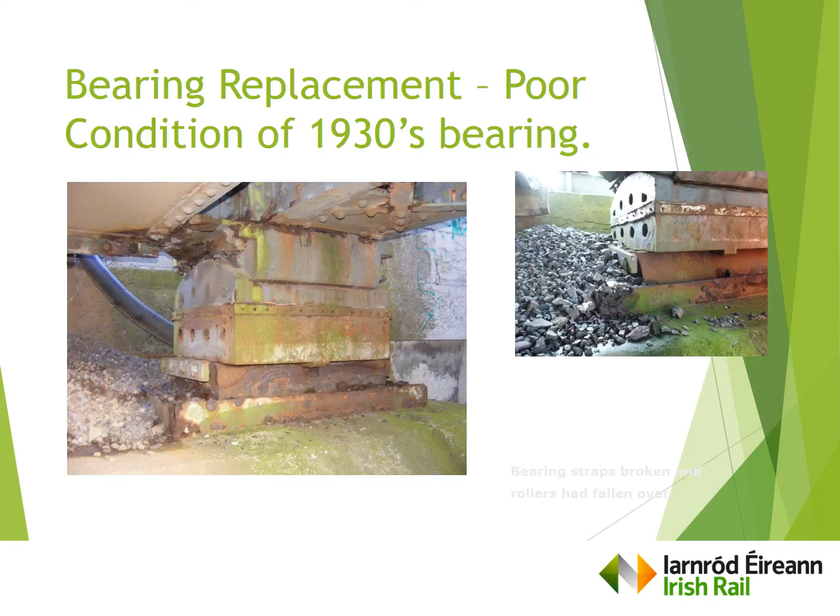We knew that the bearings were defunct and required renewal, but we also had to try and get those out. So we decided to look at the possibilities of using these holes here to jack the bridge. So this is the process we developed.

So we used high tensile bar, and we threaded it through those holes. We designed, fabricated and tested these welding brackets, and we grouted in the high tensile bars, and then we installed our jacks. We took 6 weekends to both trial and remove the original bearings. We replaced them with elastomeric pads and a new bearing base plate.

Sorry, can we go back. That top element, that cast iron element, obviously we were putting in those bars, and they were going to be highly stressed, but we needed to ensure that those bars were fully grouted, so that they weren't bending while we were lifting.

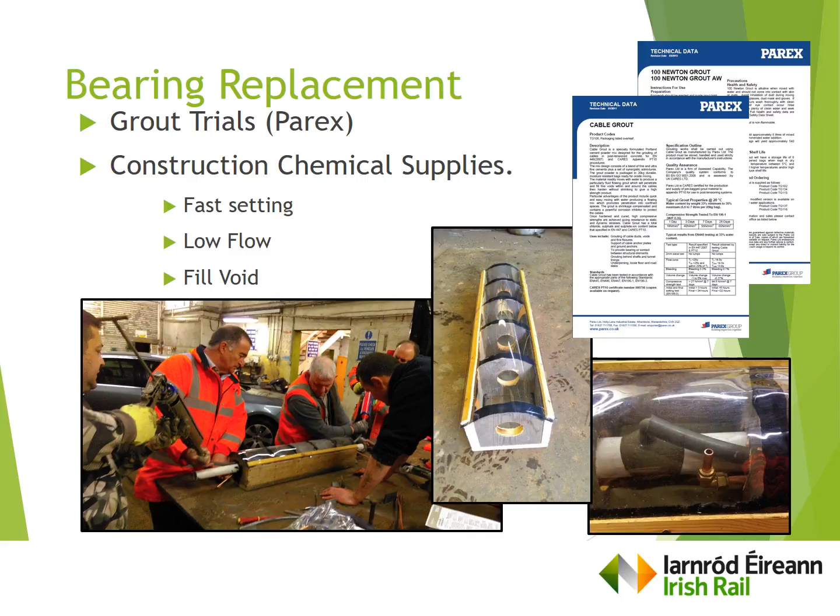So that was the installation of it. We took away the edge plate there, put in our bars, grouted our bars, and then put in our jacking plates.

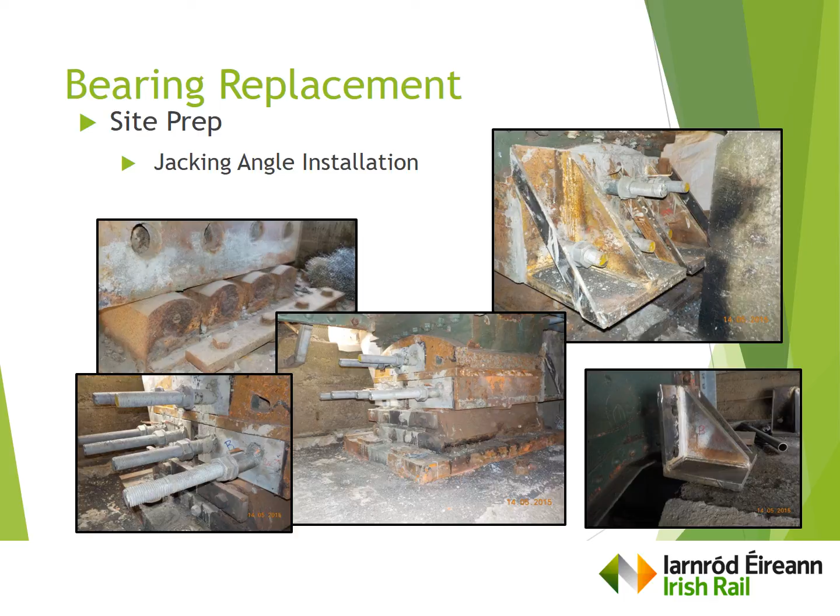When we were jacking the bridge, we had to understand and have fair confidence on what load we were lifting. So we used the original drawings to estimate the weight of the spans. The two shorter spans we estimated at about 475 tons, and the middle span about 1,050 tons, and they proved to be quite reasonable estimates. The jacking system we used was from PHL Hydraulics.

All the jacks were small, kind of near pancake type jacks. The whole system was all electronic. It was very confidence building, because our experience would be with hand-pumped jacks in the past, but now it's all computerized. With sensors, they were able to show you that you were actually jacking the bridge, that it wasn't stuck and so on. So they were able to show displacement for load.

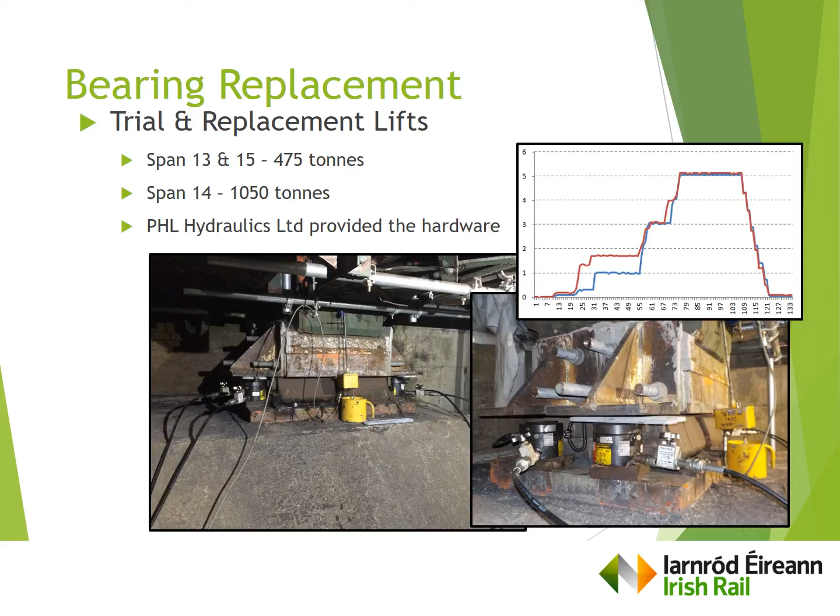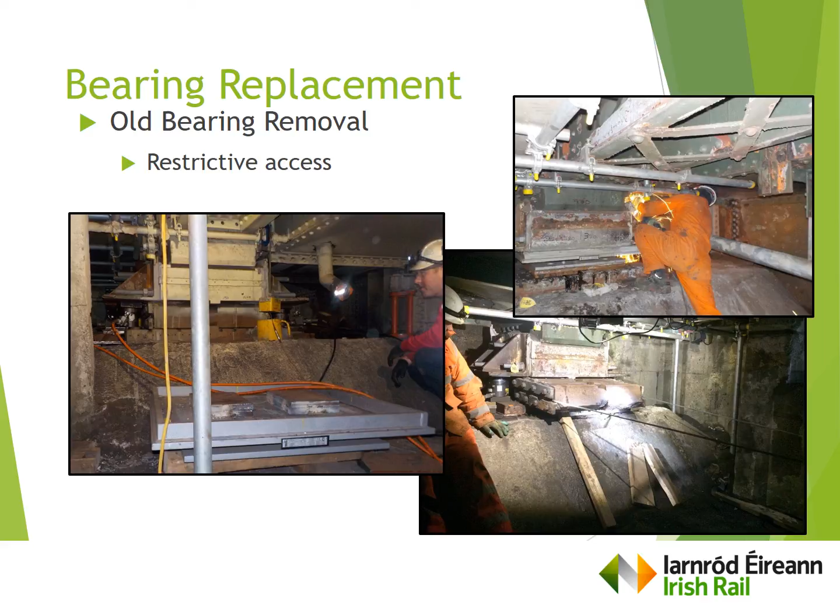Very restrictive access, very tight confined space. We had the base plate with the elastomeric bearing sat there. The jacks were put in place, the bridge jacked up, and then we were using Tirfor. We'd pull out the old bearing carriage and install the new plates, so it's in there, and the elastomeric bearing pad - you can't see the pad there, but it's in there.

Unfortunately they painted it like that, but it's painted anyway. We left the plates in because we felt there'd be significant damage trying to remove them now, and also there was no obvious jacking point before, so in the future we actually have a jacking system.

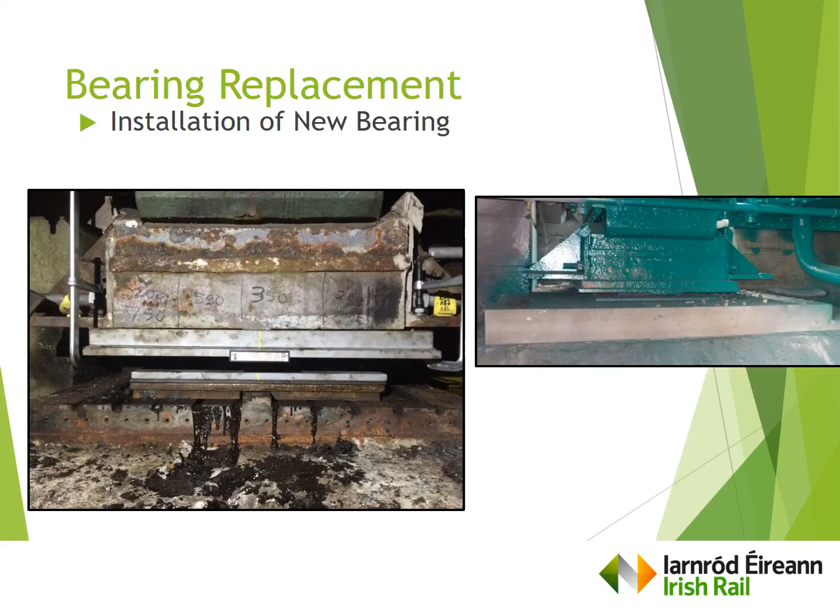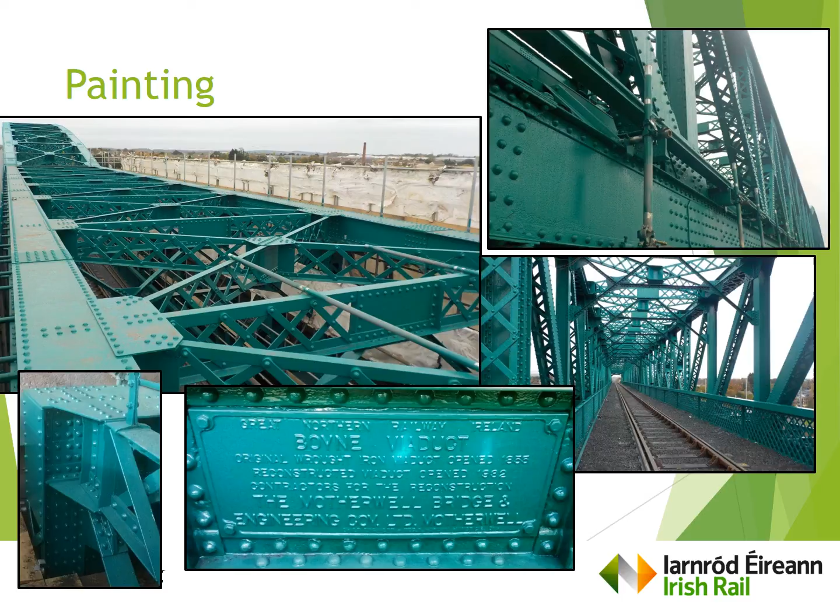And that's the completed bridge there. So that's it now.

Did you ever take the opportunity to instrument any of the bridges and see how that correlates with some of the visual defects? There are projects going on to do that, and the Boyne has been chosen as one of the projects. It's only in its infancy at the moment, but that would be the plan, to use instrumentation to further the assessment process.

You'd have real-time data, deflections, and obviously the loading. We know the axle loadings on the trains, so if you're able to get a concise model, you're able to predict a bit more with real-time instrumentation on the bridge. That is a project in process at the moment. It's a European funded project.

Thank you for that. Thank you for your talk, Stephen.